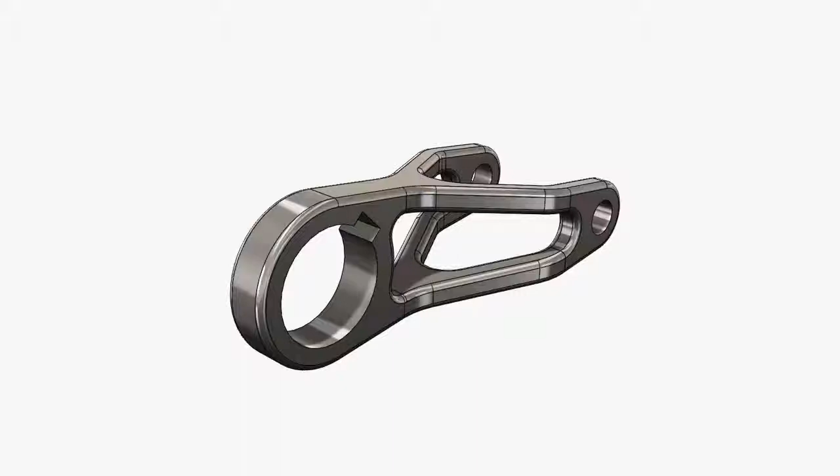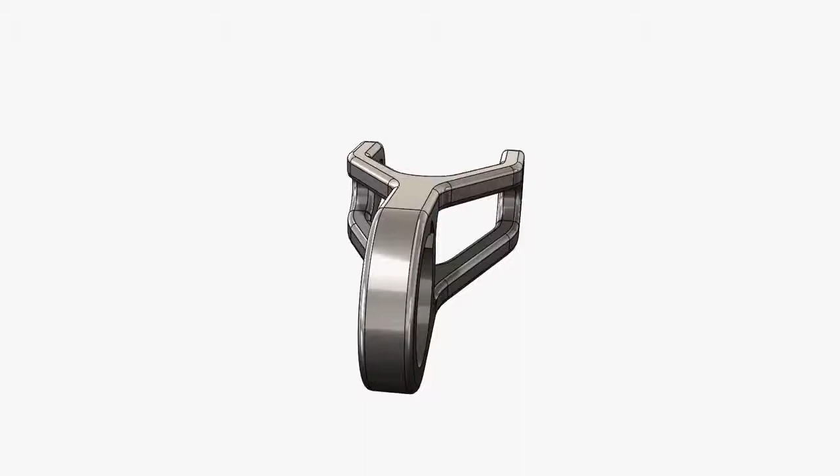In this video, we're going to take a look at the Model Mania Design Challenge from 2010. If you're unfamiliar with Model Mania, it's a design challenge held every year at SOLIDWORKS World where attendees are presented with a drawing like this and are tasked with creating the part in SOLIDWORKS both as quickly and as accurately as possible. Now, if that wasn't enough, when they're finished, they're given an additional drawing with a series of changes and additional tasks. In this video, we're going to look at how to create this part inside of SOLIDWORKS.

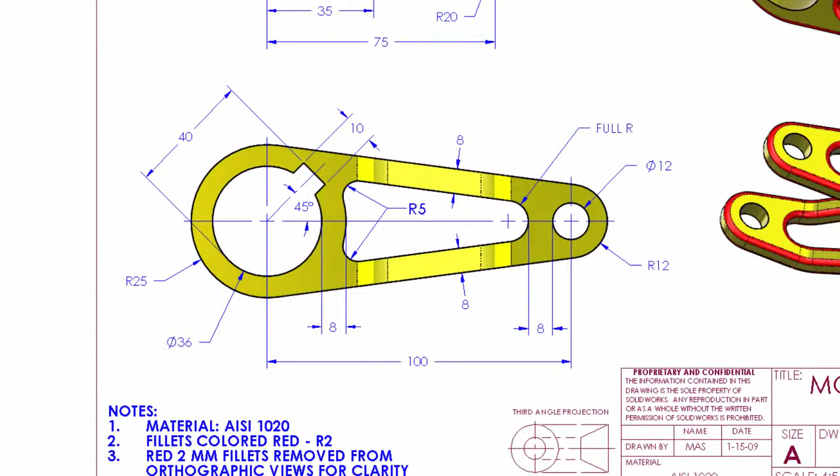It's a fairly simple part, and you'll notice that it's really comprised of two profiles. The front view, which contains all the information from the side, and the top view. We're going to look at how easy it can be to create this part, and then we'll look at the change. So let's dive into SOLIDWORKS.

The easiest way to really tackle this is to start with everything that's in that front profile, though I am going to draw it on the right plane. This really doesn't matter in this case. I'm going to start by creating a decent amount of the geometry in this first sketch, starting with the bore at the front of the part, and then I'm just going to draw a circle for the outside there.

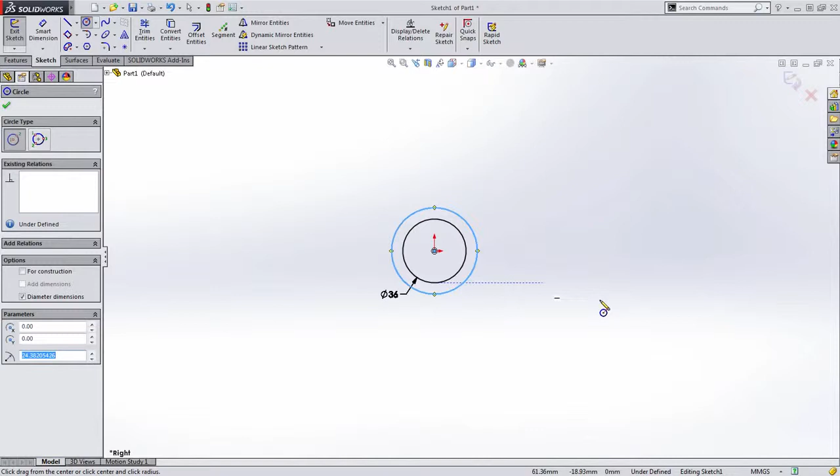I'm going to do the same thing for the smaller circle on the other side, typing in the diameter of the bore, but notice that I'm leaving the diameters of the other circles alone. And there's a reason for that. We'll look at it in a minute. I'm going to go ahead and connect these with a tangent line. Remember, in SOLIDWORKS, clicking and dragging off from a circle will capture the tangency and allow snapping to the other circle to be quite easy.

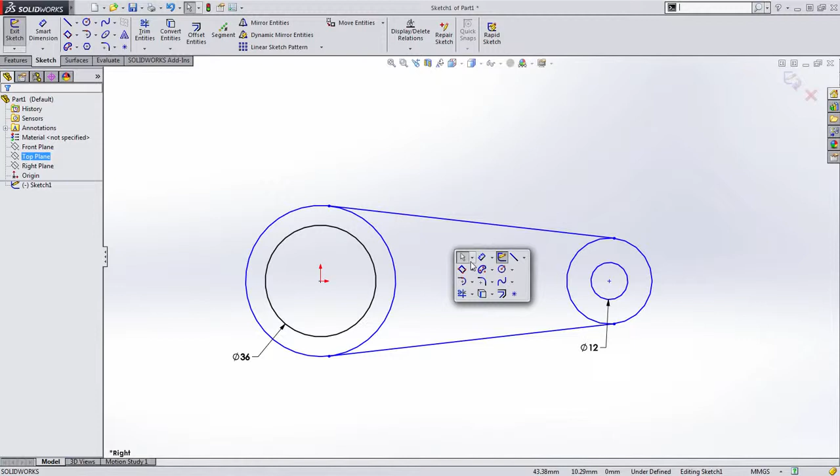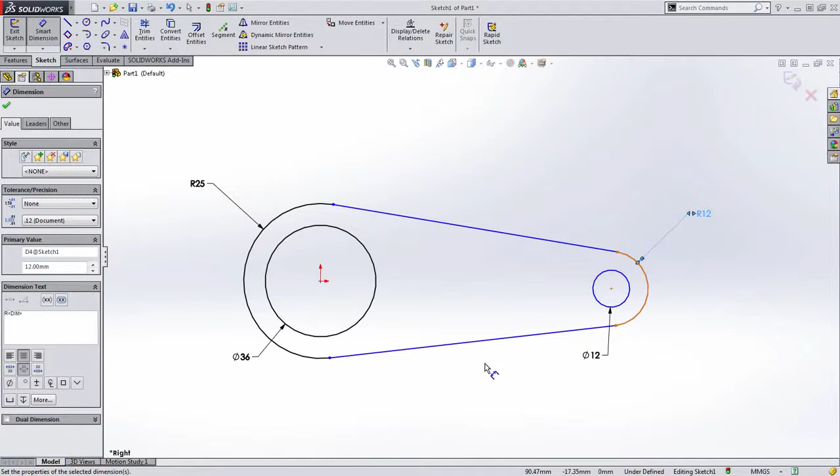I'm then just going to go ahead and trim the insides of these circles up. Now I'm going to go ahead and add those dimensions. And the reason I waited until now is notice that instead of a diameter value, because it's an arc, it's actually going to ask me for the radius, which is what I'm given on the drawing. I could have approached this by creating the diameters earlier and then changing it as well. Additionally, we'll specify the distance between the two centers here, which is 100 millimeters.

Now you'll notice that the sketch still has some blue geometry in it. This is because it's underdefined. Notice that when I click and drag this, the circles aren't specified to be horizontal to one another. So I'm going to go ahead and use my control key, select those centers, and just choose to make those horizontal.

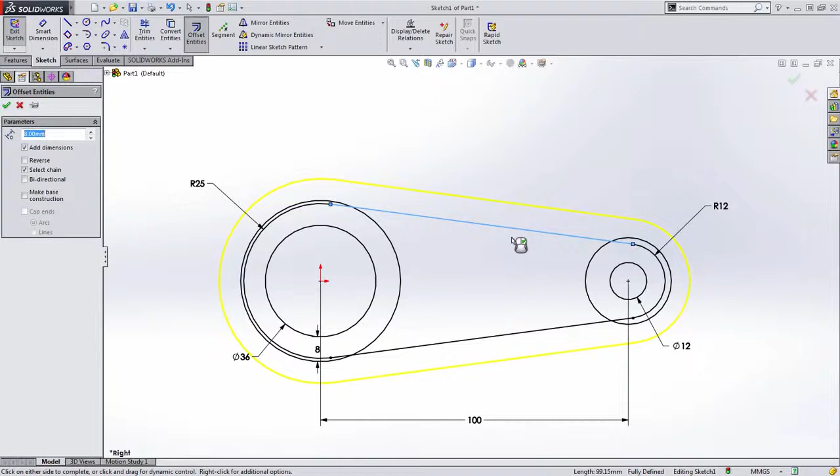Now I could include the keyway and the pocket at this point as well, but notice what happens when I do this. If I, for instance, created those 8 millimeter offsets right here, you can see that the sketch starts to get really complicated. We've spoken in previous videos about including a lot of geometry in one sketch. I want to go back to keeping things simple in this case. So let's go ahead and just extrude this to 60 millimeter width, and I'm going to choose a mid-plane extrusion in this case.

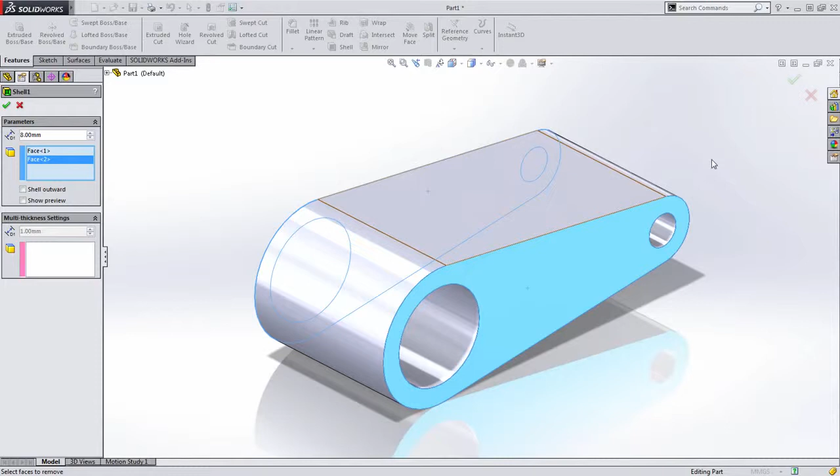Now, we want to create that pocket still, and one of the ways we could do this is to, in fact, sketch and offset all that geometry. But the shell tool provides an alternative way to do this as well. When I use shell, I'll have to remember to select that back face and this front face, and when I press OK, SOLIDWORKS removes that material, leaving an 8 millimeter offset around those features.

Then all I have to do is go ahead and add those fillets there. And in this case, I'm just going to select these edges through the geometry and specify the appropriate radius, which is 5 millimeters in this case. The fillet on the other side is a little bit more unique. We can create this using what's called a full round fillet.

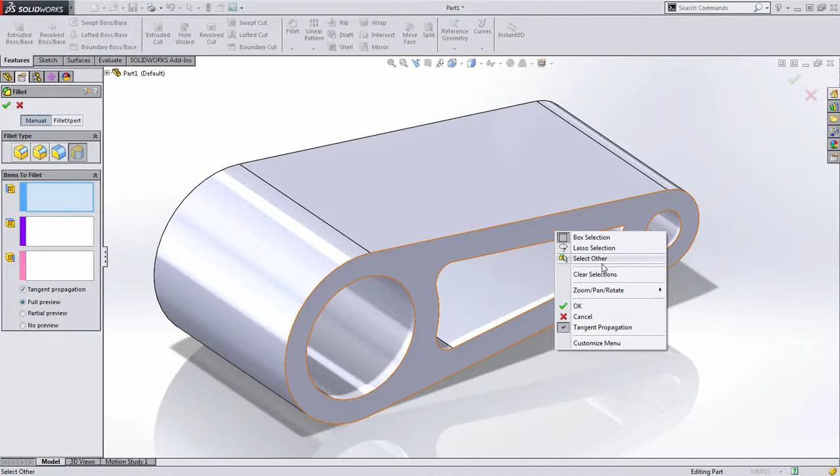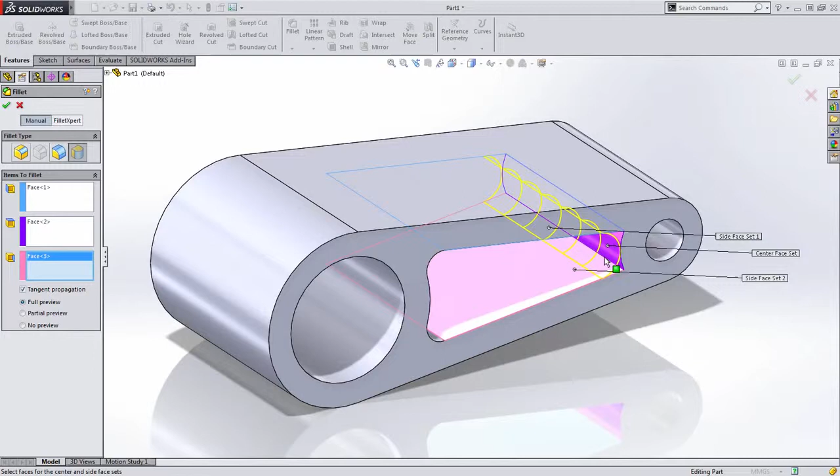When you create a full round fillet, all you have to do is select the faces in the order that you want the tangency to occur. So in this case, I'm going to select this top face on the inside. I'm going to right click to move to the next selection box in the property manager and then select the next face in the chain and repeat the process for the third face. Once you get to this point, you'll notice that there's a preview letting us know what it'll look like. Notice that this arc is tangent to all three of those faces, giving us exactly what we're looking for.

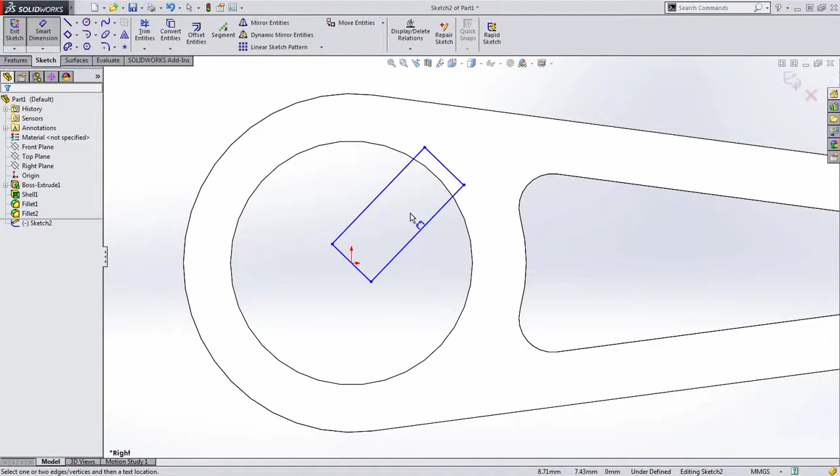Finally, while we're working on this side of the part, let's go ahead and look at creating that keyway. One of the ways I like to create keyways is just using simple rectangles from the middle of the part. In this case, we'll use a 3-point rectangle to capture the angle. Now the reason I like to do this is so that I can quickly throw a midpoint relationship onto this line. You'll see in a minute how that makes it easy to keep things centered.

Let's add the width of this keyway. Now, when dimensioning lines at an angle, you'll notice a lot of times that your cursor jumps around to the 3 different types of dimensions you can create. If you know you want to create an aligned dimension in this case, remember, you can right mouse click to lock that in and notice it won't jump around. This makes it easy to then position the dimension exactly where you want it to be.

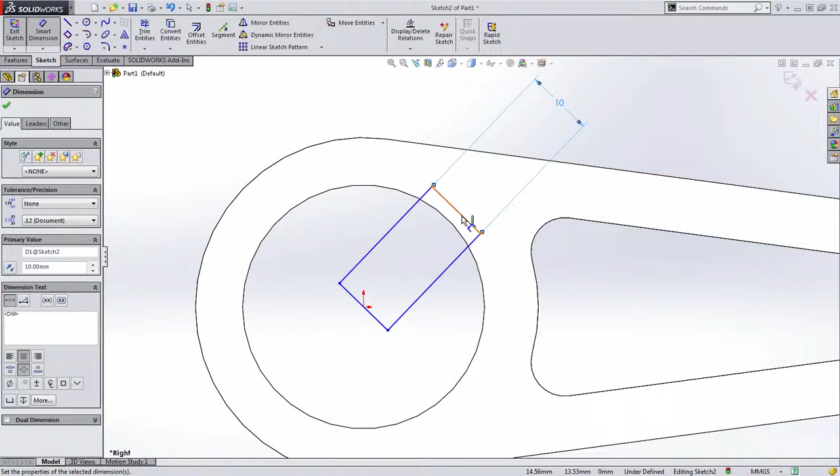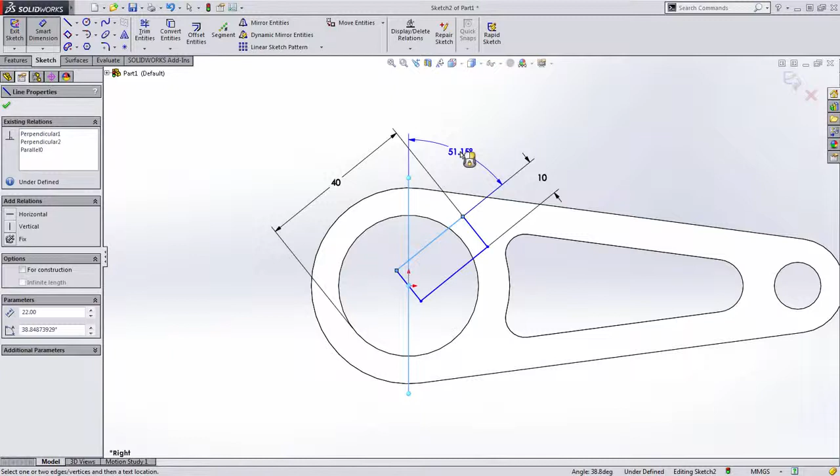For the offset distance, we'll dimension from the end of the keyway, and while holding the Shift key, we'll dimension to the outside of that circle. Finally, we need to specify the angle, but notice before I do that how by adding that midpoint relationship, this keyway is always locked in to the middle of this circle. For the angle, I'm actually going to dimension to the front plane and then just choose one of the edges on this rectangle. It's 45 degrees. We'll then go ahead and simply choose to cut this through all in both directions.

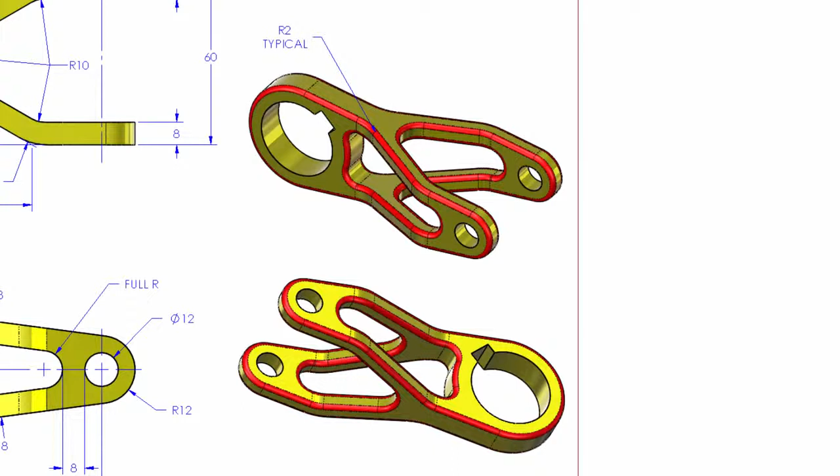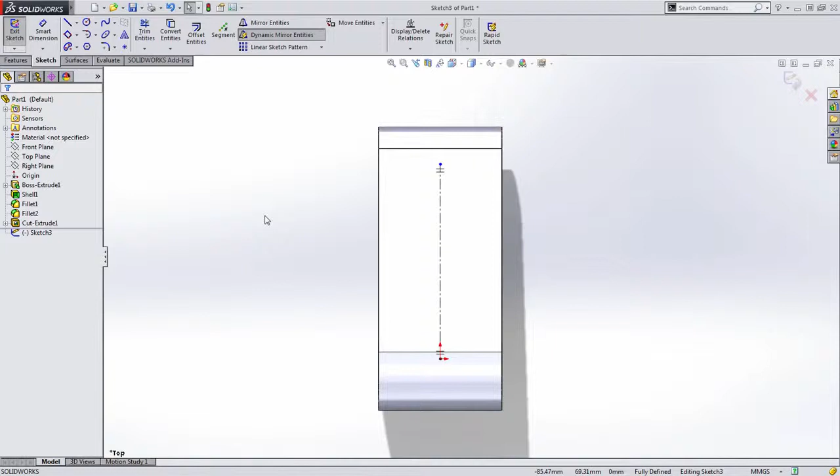Now we've created all the geometry from the front profile. If we take a look at the top profile, there's a lot here as well. It's almost like two completely separate parts, but when we look over at the isometric view, we can really see how these come together. So let's look at drawing that shape on the top profile. Because this profile is very symmetric, I'm going to start by just drawing a center line and enabling something called dynamic mirror entities. When you choose this, you select a center line, which I have pre-selected, and hash marks appear at the end of that center line, letting us know that everything that I draw on one side of that center line will be duplicated on the other.

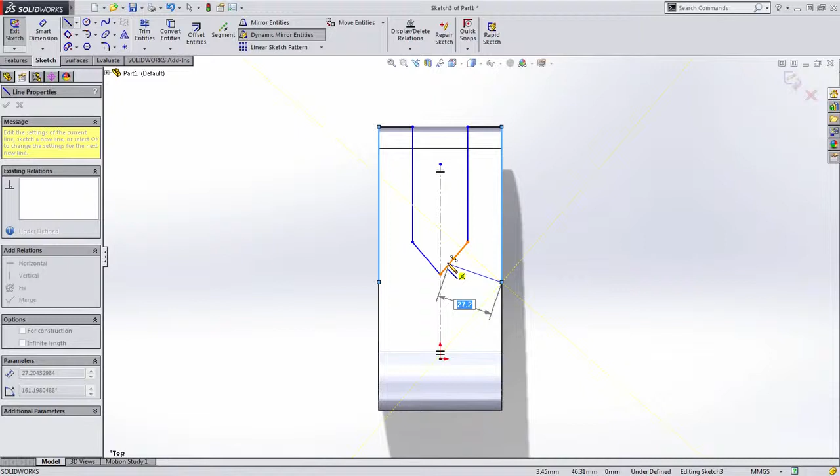Let's take a look. I'm going to start from this middle area and just draw a line out. Notice that every piece of geometry that I draw is actually duplicated over to the other side. Now this next line that I want to create, I want to ensure that it's parallel to this line. Notice by hovering over it, I get these little dotted lines that allow me to snap to that parallel relationship. That ensures that those lines will always be parallel to one another. And finally, when I close this off, because I'm drawing a line that would basically duplicate itself on the other side, SOLIDWORKS warns us of this, that it won't create that extra element.

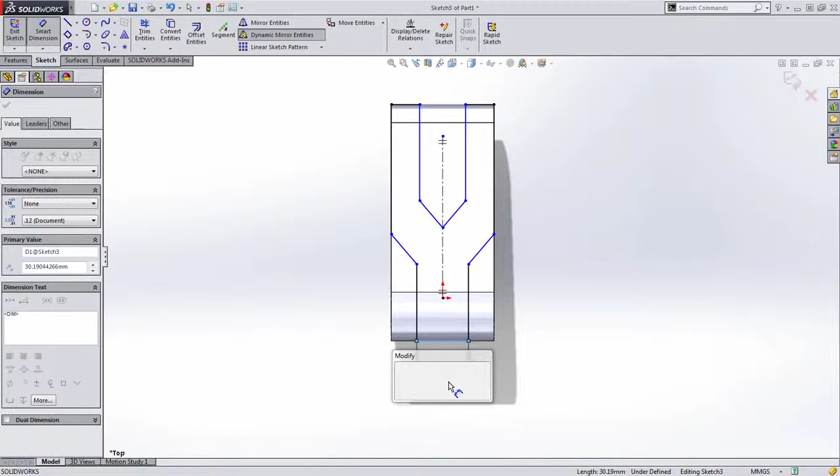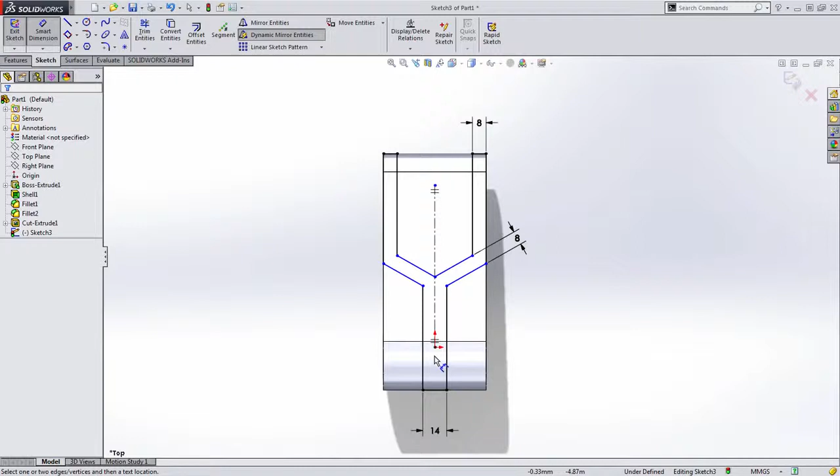Then all we need to do is go ahead and start dimensioning this. Let's start at the bottom by adding that 14 millimeter dimension to the bottom. There's an 8 millimeter dimension up here at the top. We'll also want to specify the distance here as 8 millimeters as well. Keep in mind, you could have done that as an offset, though you'll have to have deselected select chain. Finally, we want to dimension from the center of this arc to these 2 points. Well, conveniently, we drew that center point right on our origin, so I can go ahead and just select this here and add the 35 millimeter and the 75 millimeter dimensions in this case. Once we add that last dimension, you can see that the sketch is fully defined.

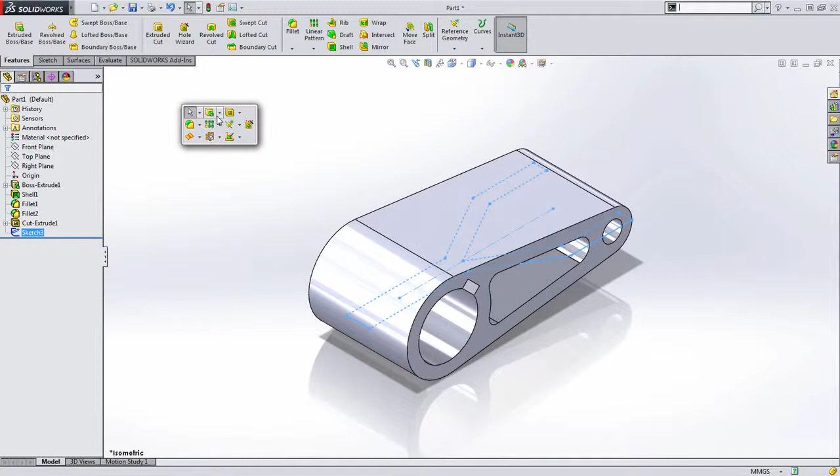Now, once this is done, there's really a few ways you can approach finding that common area between these. The first is a little more complicated, but sometimes it's actually easier when the geometry is more complex. So I'm going to go ahead and show that in this case. This isn't the ideal situation you'd use this, but what I'm going to do is create an extrusion and choose not to merge the results. So now what I have are two separate solid bodies as seen in the FeatureManager tree.

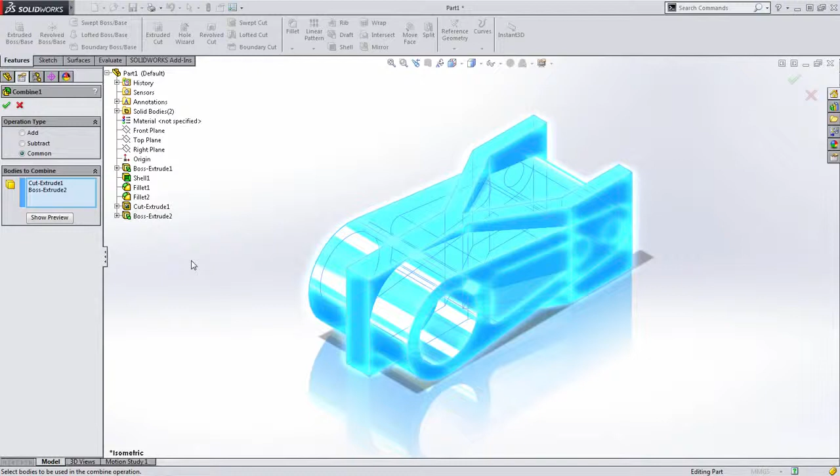If you hold the Control key and select both of these, you can right-click and choose to create a Combine feature. Combine allows you to perform a series of Boolean operations where I can subtract geometry, one body from another, add the bodies together, or find the common areas as seen in the preview here. So that's one way we could have achieved this. I'm going to go ahead and undo to step back to this sketch.

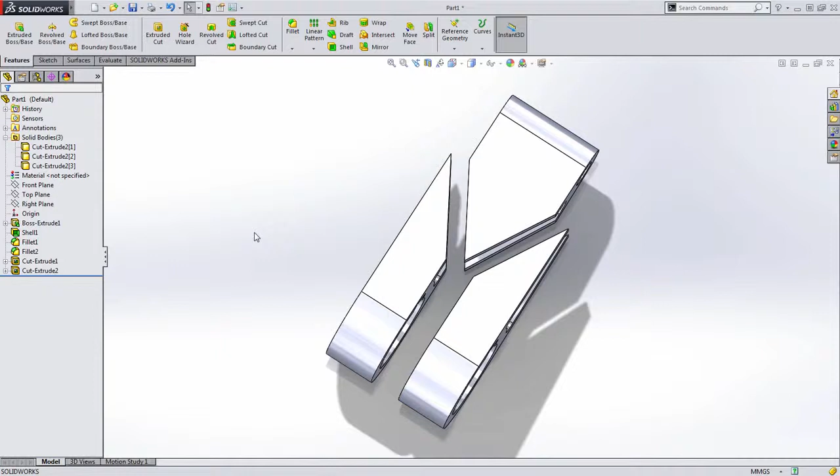What I'm going to go ahead and do is instead create a cut. Well, you might be thinking, why would you create a cut? That's going to give you exactly opposite of what you need, which is what we see here. Within that cut extrude feature, there's an option called flip side to cut. And what this does is instead of cutting the sketched area, it cuts everything outside of that area. And in this case, gives us exactly what we're looking for.

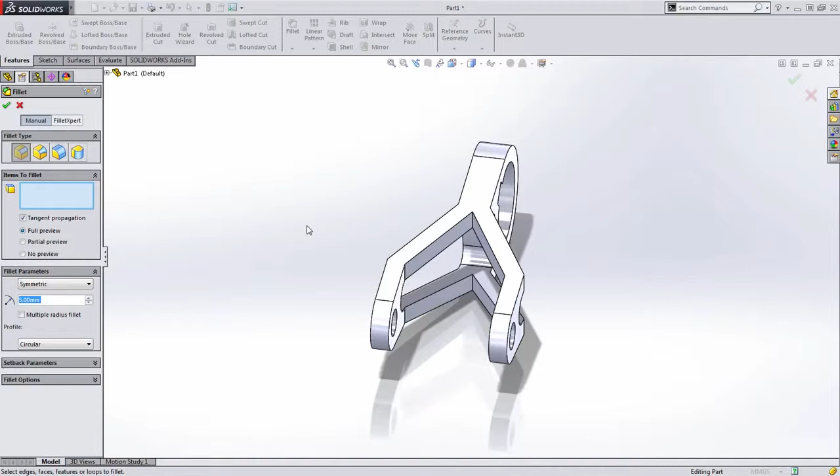All that's left is to go ahead and add a few fillets. In this case, I want to add a few 10 millimeter fillets. I'm going to start by grabbing this edge, and you'll notice this pop-up. This pop-up's convenient when selecting edges to grab edges that are similar, and in this case we grabbed all the inside edges with just two selections, first grabbing the edge and then grabbing the appropriate icon.

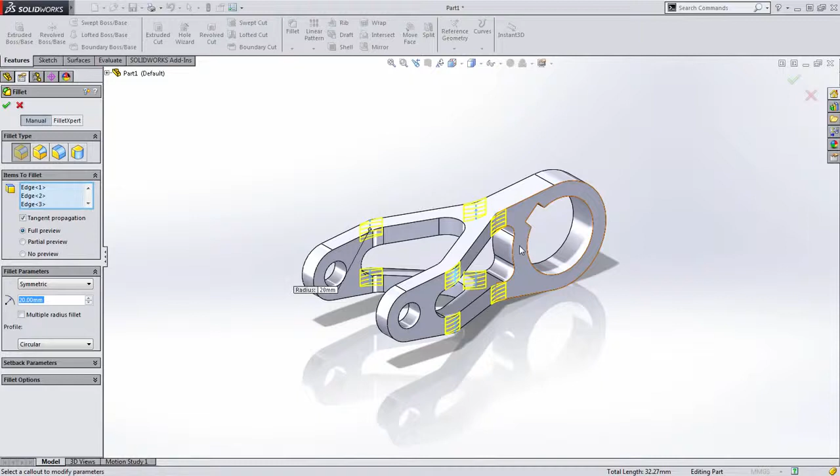We'll go ahead and do the same thing for these outside fillets, which are slightly larger at 20 millimeters. I'm going to select the edge, and then I'll toggle through the selections to get what I'm looking for. Same thing here. I'm going to select this edge, grab the appropriate ones, and then just right-click to confirm that. Finally, there's a series of 2 millimeter fillets that need to be added throughout the entire part. We're going to add those to the pocket here and the pocket on the outside right here.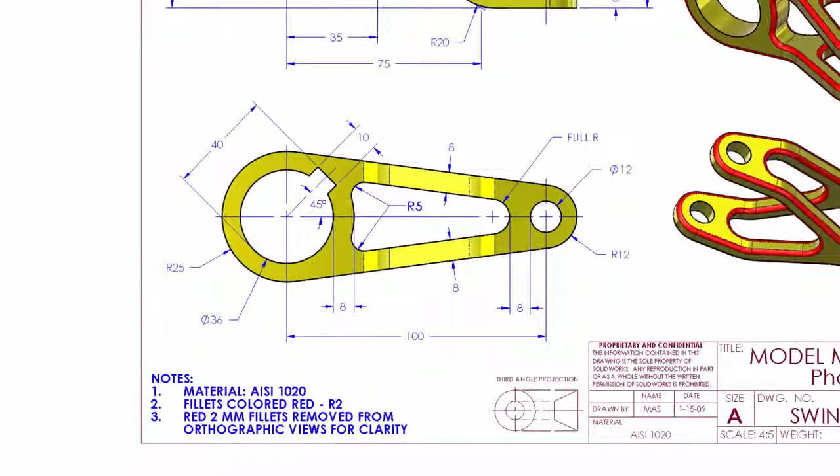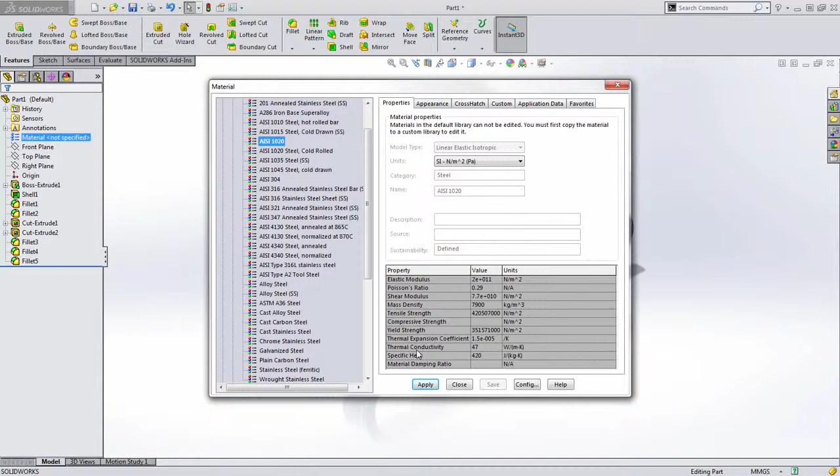So we've got our part. It's for the most part completed. There is one other step on the drawing. If you look in the lower left-hand corner, they do specify a material. In SOLIDWORKS, we can do this by simply right-clicking on the material node and choosing the appropriate material from our favorites list, or if it's not on your favorites, going into material and choosing from the library that's available. And in this case, AISI 1020 will not only apply the appropriate appearance and crosshatch, but also all the physical properties of that material as well.

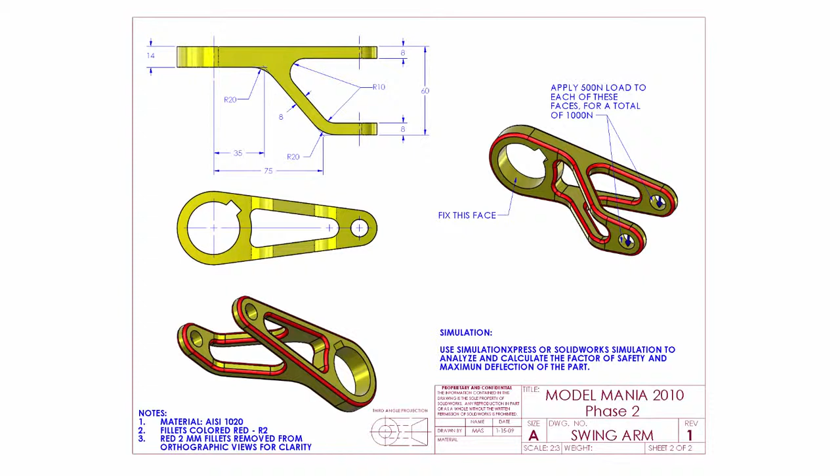So not only does the part look different, if we go to evaluate, we can see that we get accurate mass properties. This is also going to be important once we move on to the next steps, where we're going to have to perform a simulation. Speaking of, now that we finished the part, we would be given drawings for phase 2. When we look at the phase 2 drawing, we can see that there's a significant change to that sketch we created from the top profile.

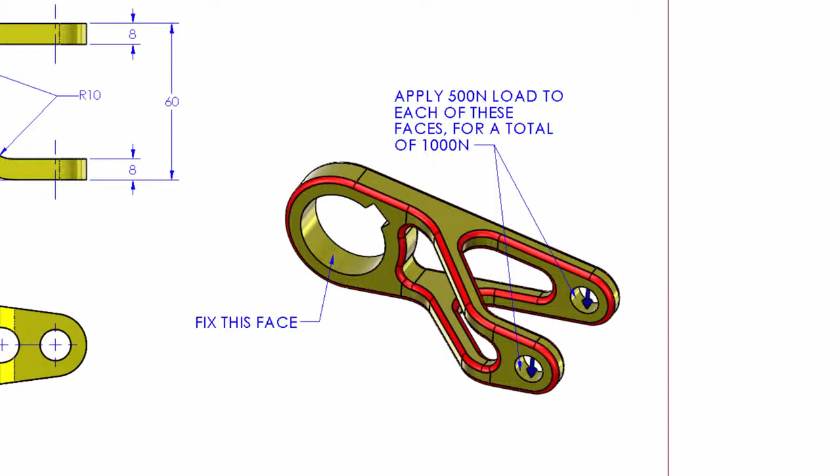No longer is it a Y shape that's symmetric. Instead, there's only one branch coming out to the side. This can actually be a bit complicated, so we'll look at that. But also notice that we're required to perform a simulation on this part and get the results from that. So let's dive into SOLIDWORKS and look at how we'll make these changes to the part.

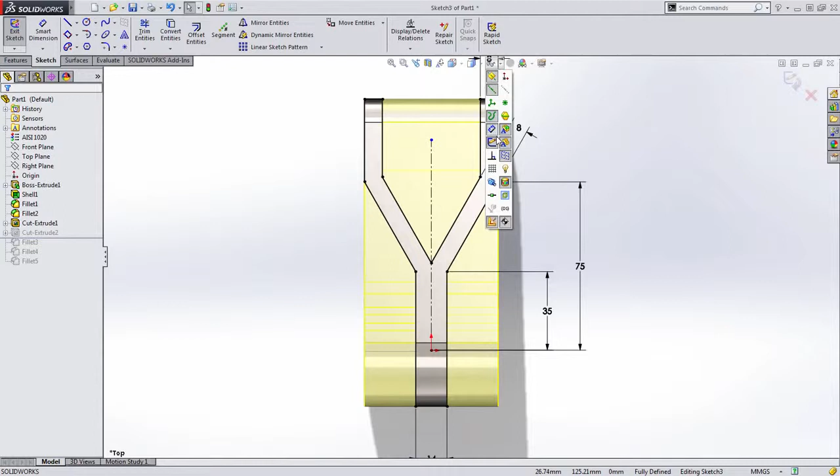Anything from the right-hand profile really hasn't changed. When we look at that, none of that geometry's changed. Everything we need to change happens in this cut extrude feature. So I'm just going to roll back and edit this sketch. We don't have any of these jogs taking place over here. But before I go about deleting geometry, let's turn on the visibility of our sketch relationships so that you can see what happened when we created the mirror.

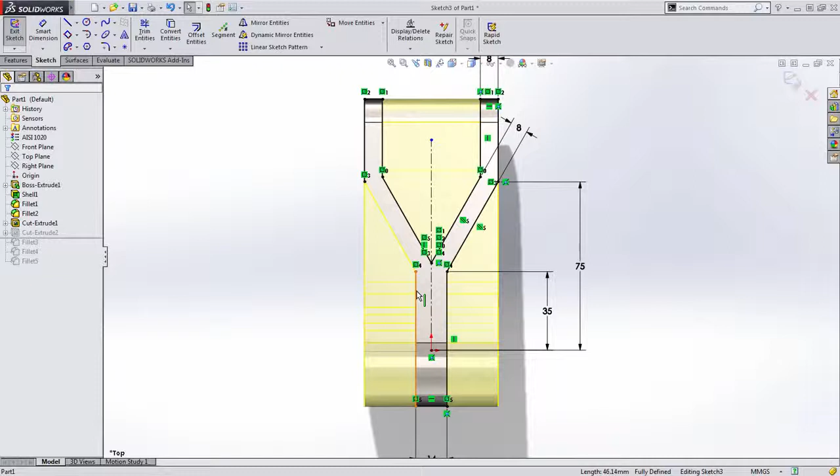When we mirrored the geometry from one side to the other at every vertex, we created a symmetric relationship which maintains the symmetry across the center line. Keep that in mind as we remove some of this geometry. In this case, I'm going to remove this line here and this line here. But notice that I still can't drag this endpoint over, and that's because of the symmetric relationship to the endpoint on the other side. So in this case, I'm going to delete that. Now I can drag this endpoint over to here.

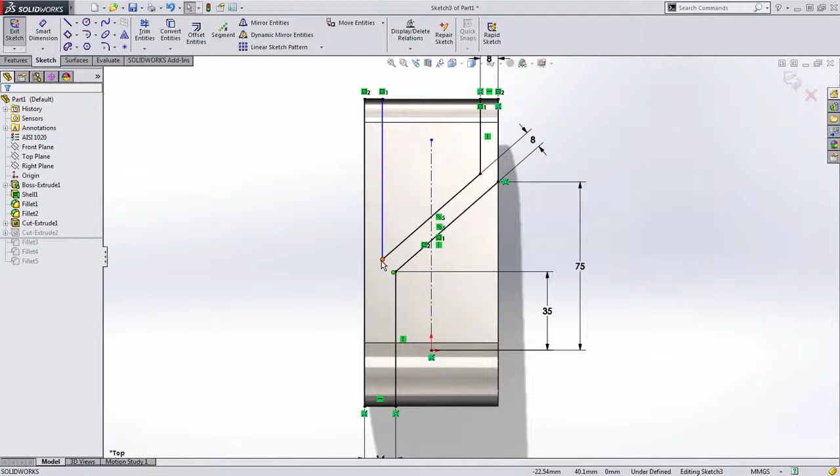We also don't need this angled line in this case. But notice what's happening here. These two lines can't move because of these symmetric relationships here. Now you can do a few things to solve this. We can use the trim tool and apply a corner trim, in which case I'll grab this line to this line here, and that'll add that because these endpoints still stay locked in. But notice when I do this from this line to this line that this line turns blue. And the reason is the relationship that was locking this endpoint location in is no longer there.

So the line doesn't actually know that it's vertical from when we created it. So we'll remedy this by just adding that vertical relationship in this case. Now when I go ahead and close the sketch, we can see that we have pretty close to what we needed, but all the fillets need to be updated. Let's see what happens when we roll forward.

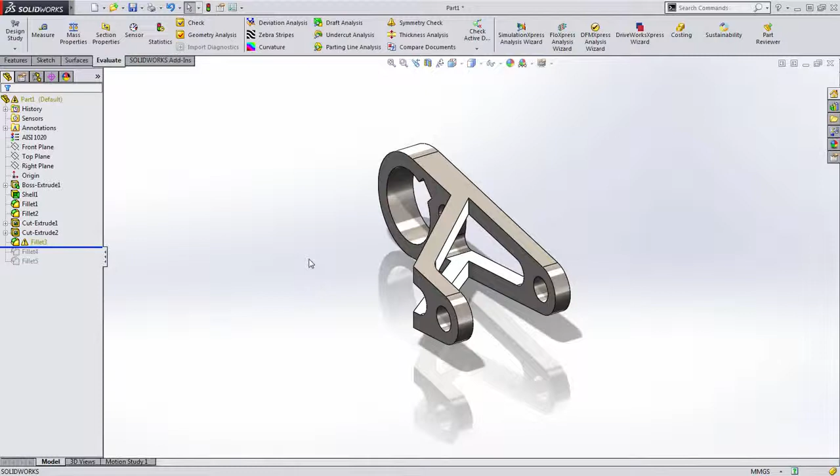The first fillet has a warning on it. Notice this is because the edges that were over here are gone, and the elements that this intersection was created with have changed. So when we go to edit this feature, you'll notice that most of the edges are missing. All we're going to do is go ahead and reapply this fillet to a few of these edges here and here. Now, we could go through this dialog box and remove all these missing edges, but if you just press OK, SOLIDWORKS will actually do this for you.

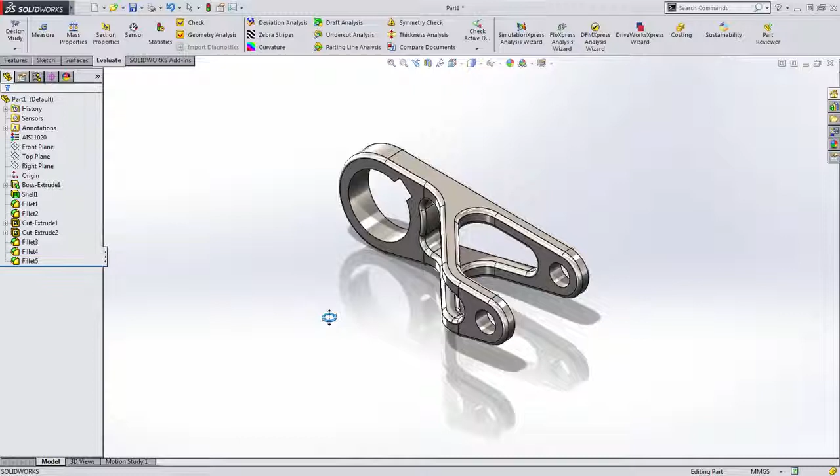The same thing happens on the next fillet. Many of the edges that we had selected are no longer there. These edges on the outside over here and the ones that were on this side. In this case, all we have to do is press the OK button and let SOLIDWORKS remove them from the selection list for us. The last set of fillets will actually update perfectly the way we had them before. So we've gone ahead and made those changes.

The last step we have to do here is to perform a simulation and find the factor of safety on this part. For this, I'm going to use Simulation Express found in every version of SOLIDWORKS. It's pretty easy to walk through this step-by-step process. I'm going to skip reading all this text and just go on to the first step in this process where we need to add a fixture.

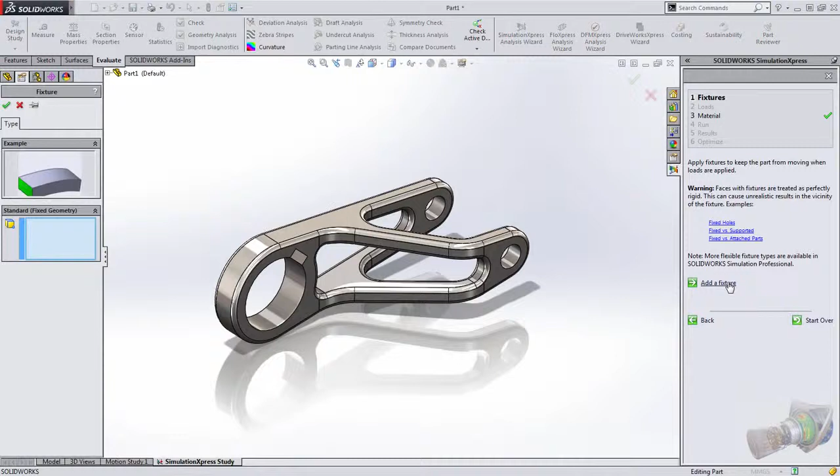If you look at the drawing, this fixture is applied to this inside bore right here. So I'll go ahead and select that and press OK. At this point, we could add more fixtures, but none are needed, so I'll just simply press Next. Then we need to specify any forces we have.

We want to apply the forces to these two faces, but notice the direction that that force is initially being applied in. It's directly out towards those faces. That's not what we want. We want to apply the force straight down. So we're going to choose Selected Direction, and for an entity to specify that direction, we're going to choose our top plane. Notice that the arrows have updated and they're pointing at the top plane, though in the wrong direction, so we'll choose to reverse the direction.

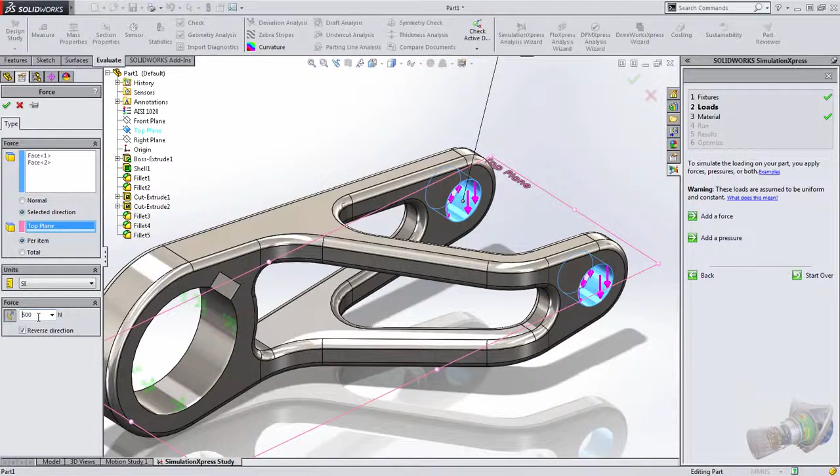Also notice that we need to apply 500 newtons of force to each one of those elements. So here you have the choice of choosing between per item or total force. We're going to choose per item in this case and press OK. So we've added our fixtures, added our forces. The next step would ask us to specify the material. But because we already defined this, notice that the information's automatically captured for us. So we can skip this step.

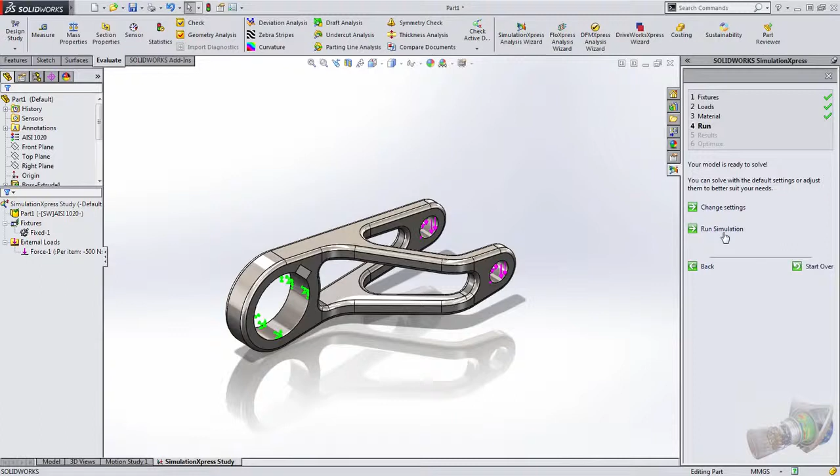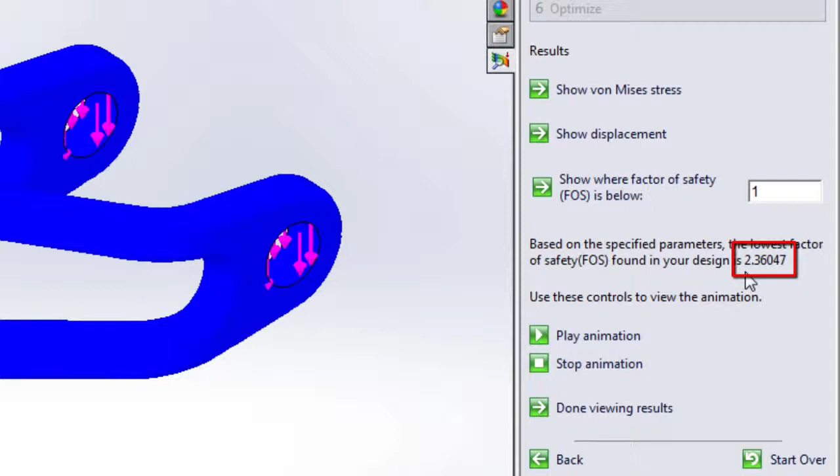The last thing we need to do is go ahead and run the simulation. This is pretty quick. SOLIDWORKS will quickly generate some results and let us know how the forces act on the part. Is this what we expected? If it is, we can simply say yes to continue forward and view these results. The results we get in Simulation Express are fairly simplified compared to SOLIDWORKS Simulation, but we do get things such as factor of safety. In this case, it's 2.36047. You could probably just round that to 2.36.

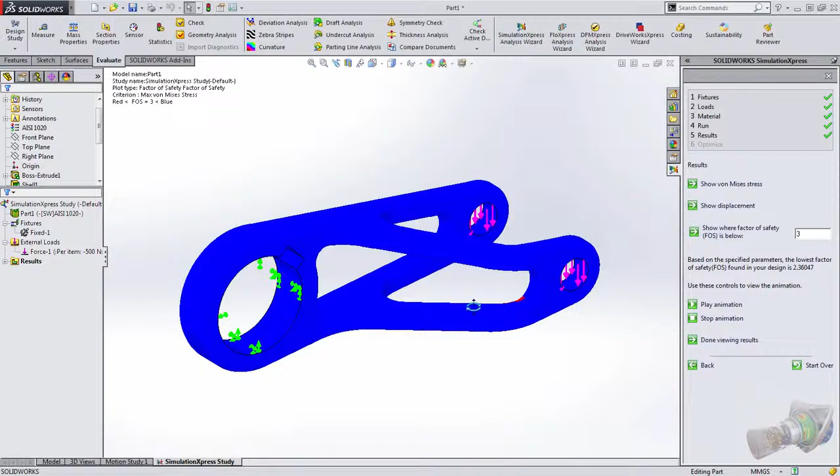Likewise, if you wanted to see where the weak areas in your design are, you could update this preview to show us areas in our model where the factor of safety is below 3. And in this case, we can see that it's where this bend takes place right here. Additionally, if you wanted more information, you could get the maximum deflection, which is asked for. So we can say show displacement. And here we get our maximum deflection, which is given in scientific notation. So we could just jot it down like that, 1.896 to the negative 001 if we wanted to.

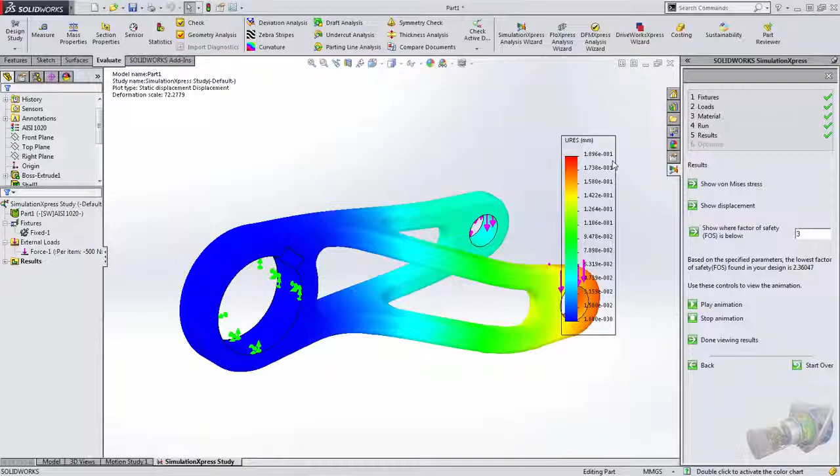So we've gotten our results. So as you can see, the part was fairly simple to create, but the change was significant in this case. And in the end, we showed how we could use SOLIDWORKS SimulationXpress to quickly analyze the results and see how strong our part is.